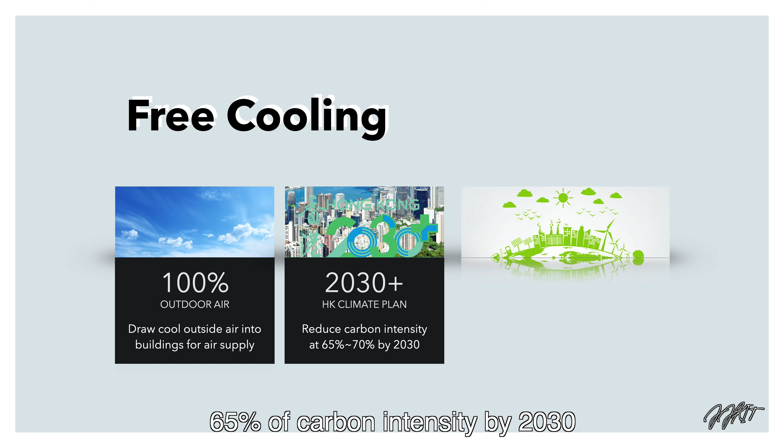Free cooling works by fully introducing outdoor air, as Hong Kong aims to reduce 65% of carbon intensity by 2030, while it could save around 30% on energy usage.

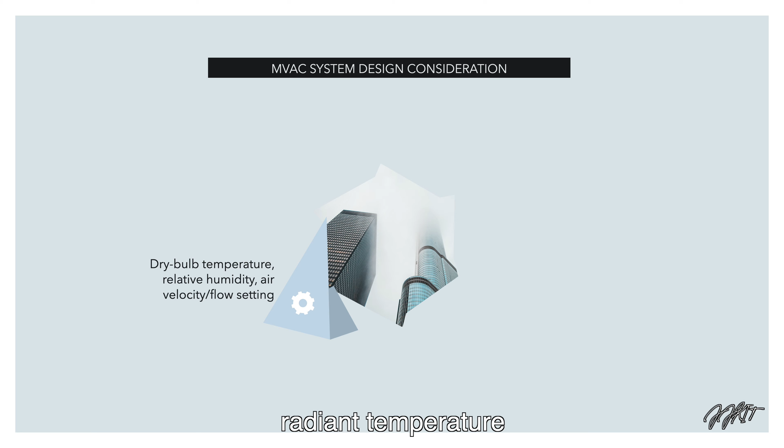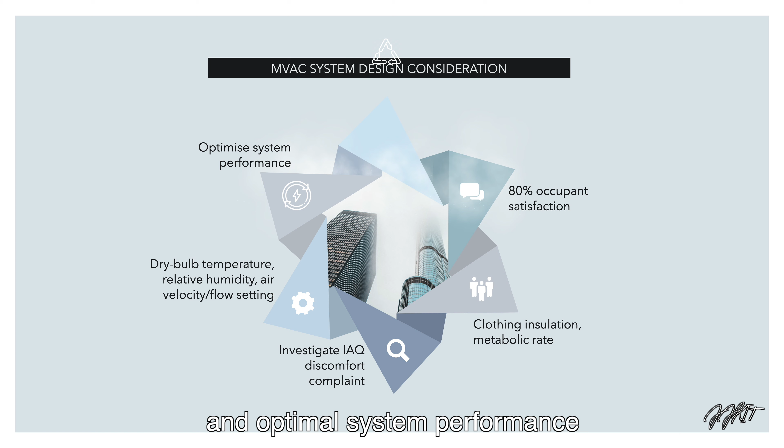MVAC system design considers radiant temperature, relative humidity, and clothing insulation. The system design aims to achieve 80% of occupant satisfaction and optimum system performance under sustainable life cycle.

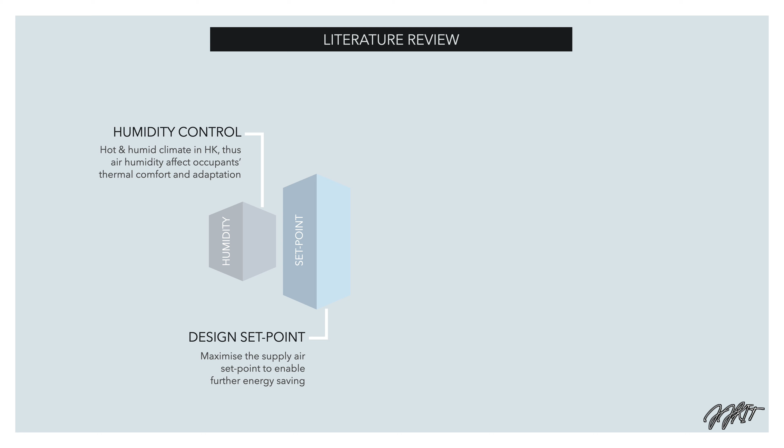Literature has been studied to develop deeper understanding. Humidity control and maximum set point is reviewed for system setting. Case study at Germany and control strategy is examined for further monitoring, and payback calculation is learned to evaluate the economic saving.

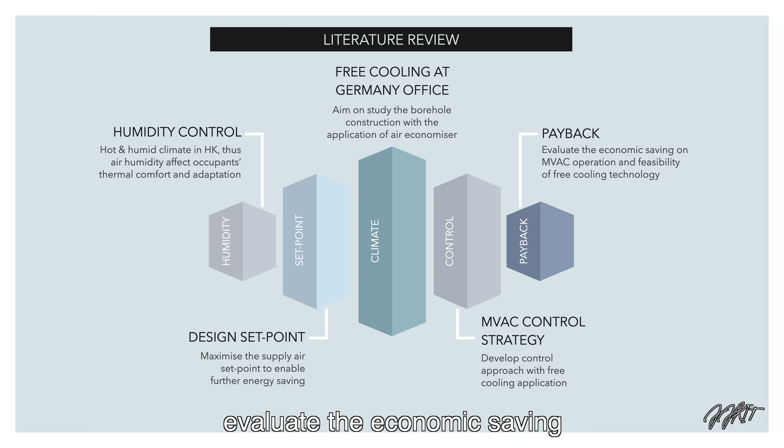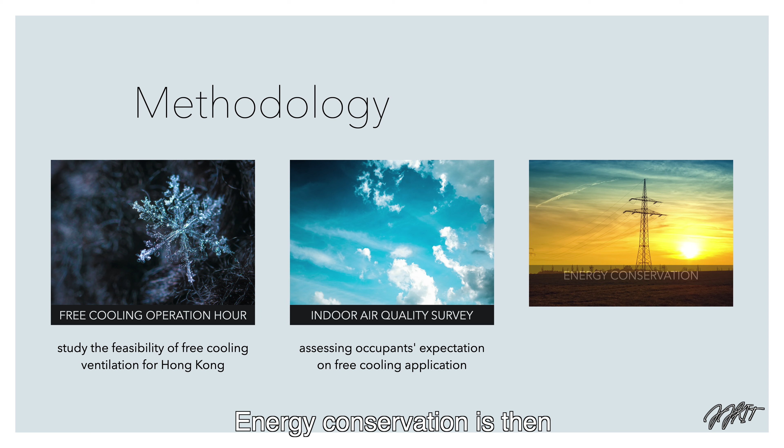It is necessary to analyze the available days of free cooling and identify occupants' needs on ventilation system. Energy conservation is then estimated with the figures above.

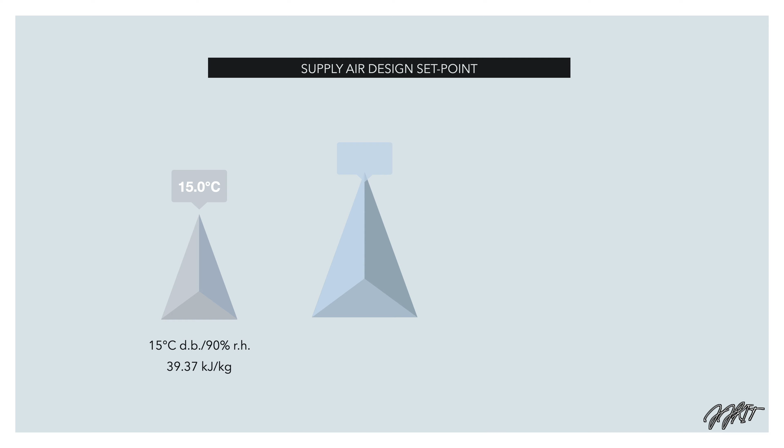Daily enthalpy is plotted from mean dry-bulb temperature and relative humidity. Three supply air conditions of 15, 19, and 25.5 degrees Celsius are set up to study their potential on free cooling.

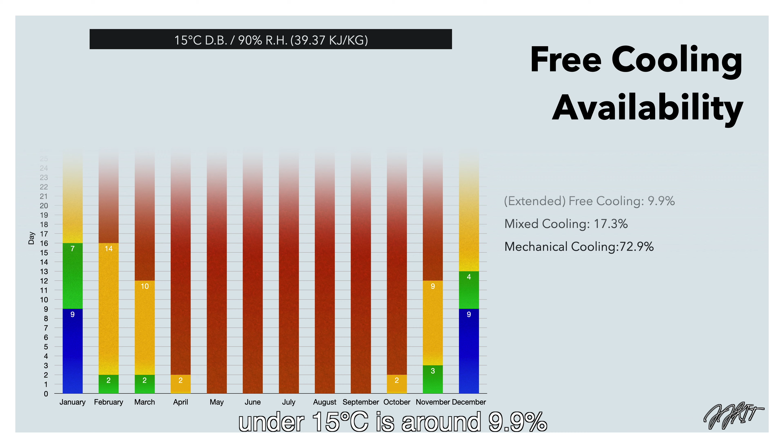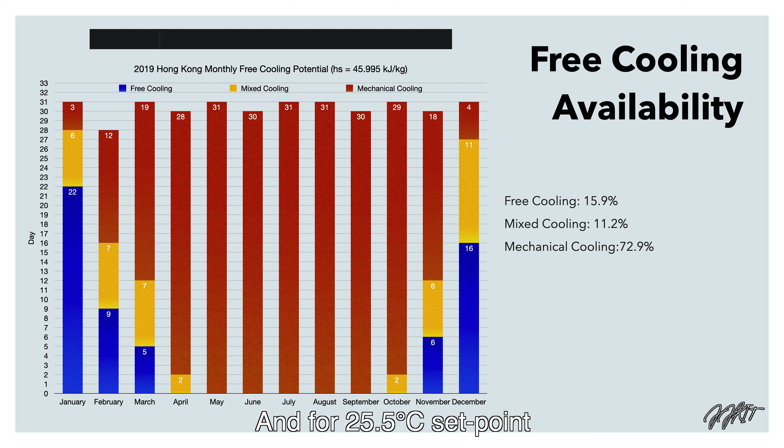The availability of free cooling in 2019 under 15 degrees Celsius is around 9.9%. Under 19 degrees Celsius condition, free cooling is increased to 15.9%. And for the 25.5 degrees Celsius set point, free cooling potential is maximized to 27.1%.

Gross energy consumption of traditional HVAC system is around 2,300 MWh. Annual energy saving can reach 540 MWh under free cooling application, which saves around 23.3% of annual energy consumption.

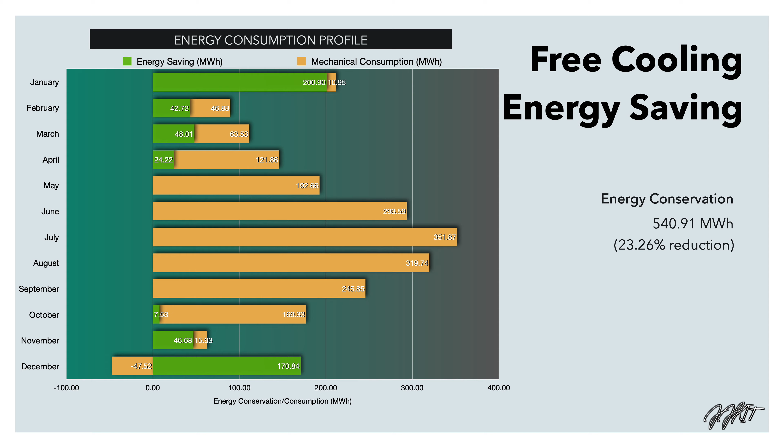In the same consequence, carbon emission can reduce 382 tons under free cooling application. During December and January, it takes up 68.7% of annual carbon reduction.

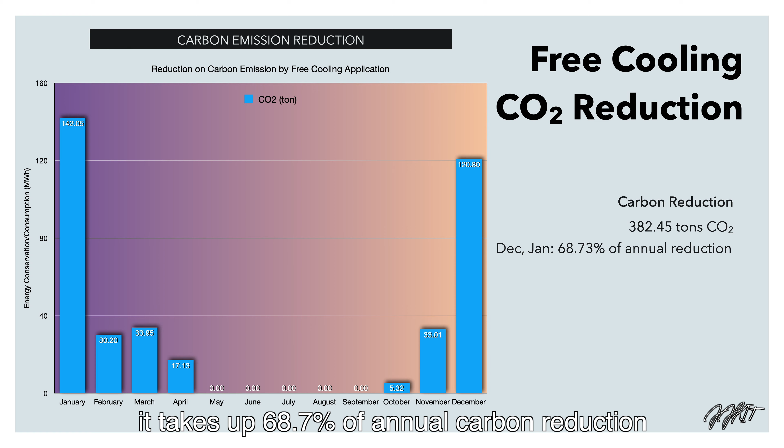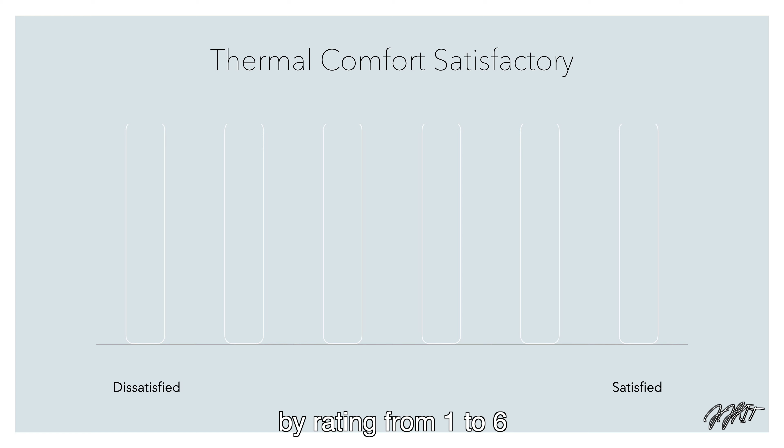Thermal comfort satisfaction is inquired by rating from 1 to 6. Only a quarter satisfied with their work environment, which reflects the system performance is poor.

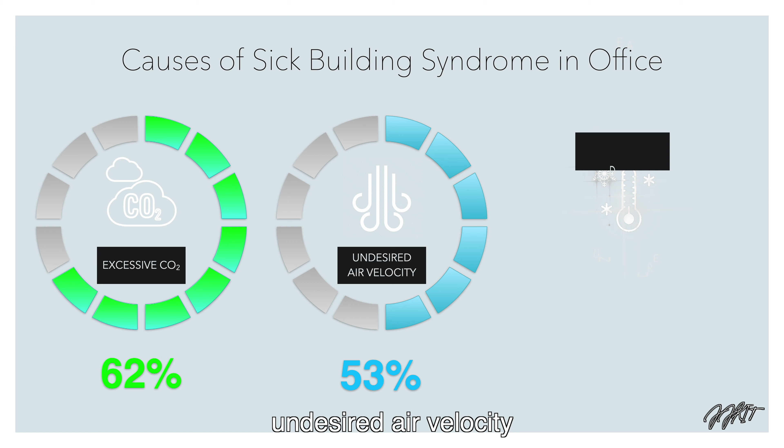Over 60% of respondents experience excessive CO2 concentration, and half of them also found undesired air velocity. Around 40% of occupants suffered from displeasing outlet temperature.

Corresponding to IAQ enhancement by free cooling, around 37% agreed to the improvement on temperature and relative humidity, and 65% of them assess that CO2 concentration can be improved.

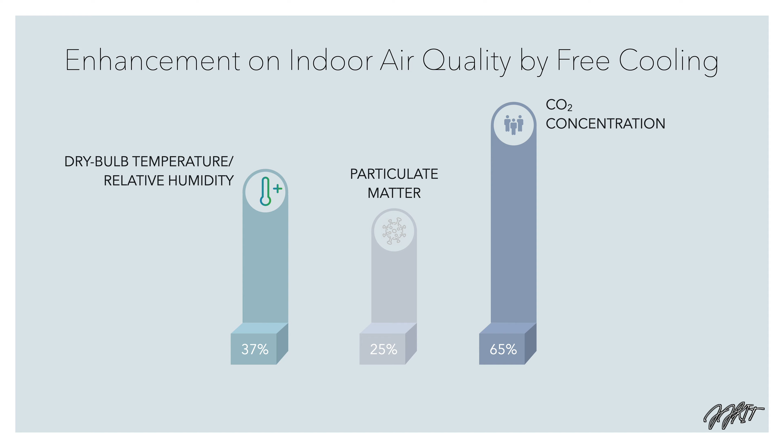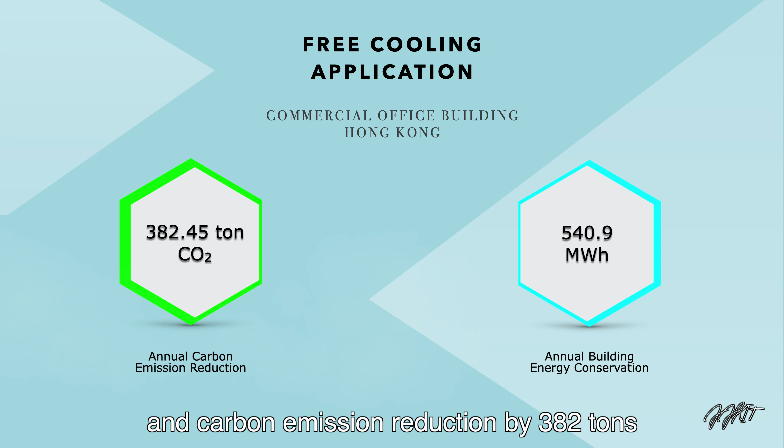Free cooling benefits from energy conservation by 540 MWh and carbon emission reduction by 382 tons. 22 points and 5 points can be attained from BEAM Plus, energy use and health and well-being respectively.

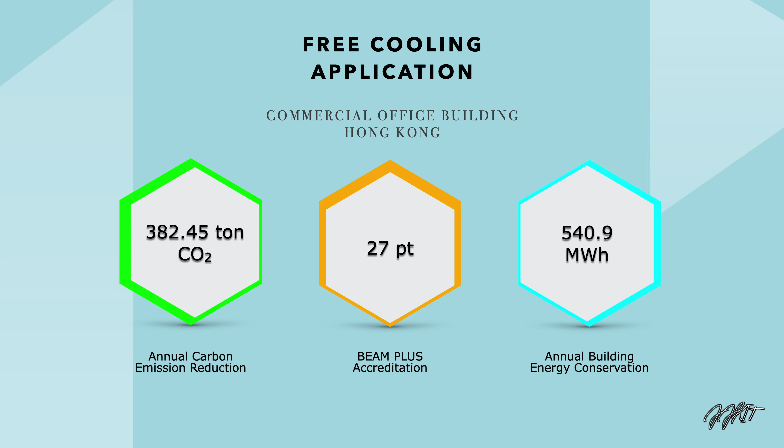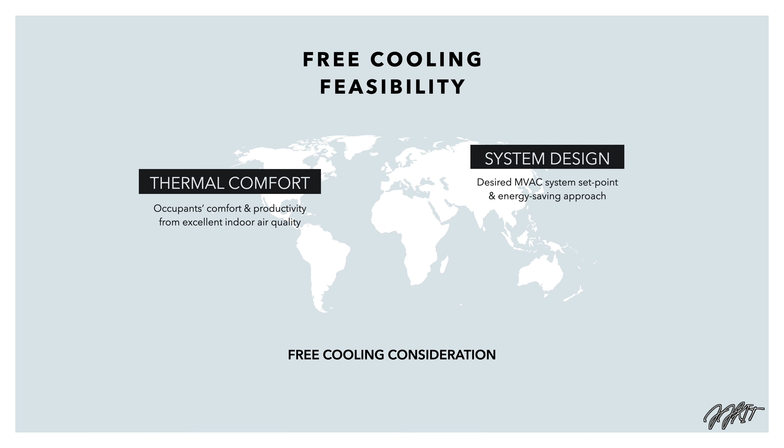Although free cooling optimizes system performance significantly, actual thermal comfort is necessary to be assessed after building occupation. The system is also needed to meet the design point with energy-saving approach. To further understand the saving potential, geographic advantage needs to be well studied in terms of year-round climate.